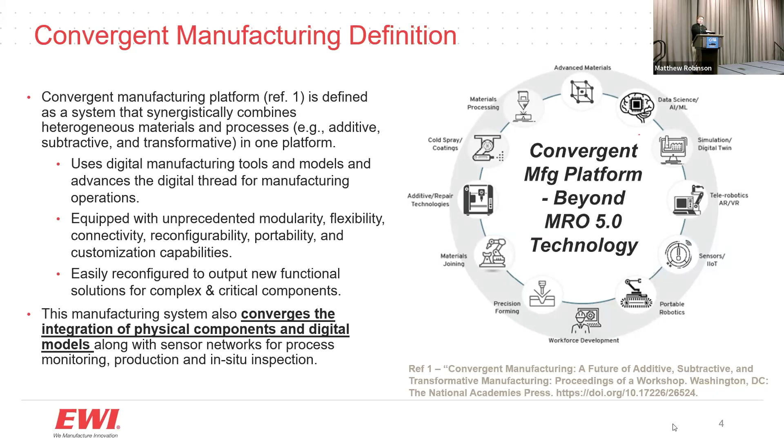And so for us, that's where we see it is, it's not just the software side, it's software enabling hardware to do a process, right? For us, that's really important because at the end of the day, if you can't do a process the right way, you can't really automate it to begin with, right? And that includes everything from materials all the way to the final end robustness.

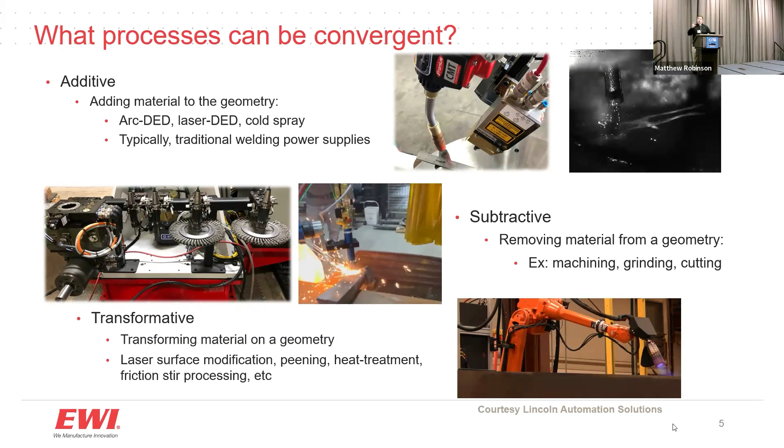And so we kind of define convergent processes in 3 different buckets for us. There's additive processes that can be anything from arc DED, laser DED, cold spray, thermal spray, using traditional power supplies, things that already exist. We have subtractive technology, so the stuff with PushCorp that they just talked about, robotic torch cutting, anything like that where you're actually doing material removal. And then there's also transformative, heat treating is a thing, right? You do something, you mess up the microstructure, you got to go back and do the heat treat to fix it. And so all of these things are converging hardware processes with material properties with software tools that kind of define all of that.

And so at EWI, we have lots of different robot systems. They're all off-the-shelf equipment, mostly, that we kind of use for this type of stuff. So this is our gantry system. I throw it up there because it's big and flashy and sexy. But it's got 2 different arc welding power supplies on it. We actually just integrated a 6 kilowatt laser into it as well that we're using for laser shot peening and also some laser DED applications. We've got a PushCorp on there doing grinding, brushing, machining on this system as well, all within the same scope. We will be using 2 or 3 different commercially available software tools to help enable this, PowerMill, Adaxis, Siemens NX, all of that kind of stuff we kind of dabble in and play in just depending on what our clients need and commercial people need.

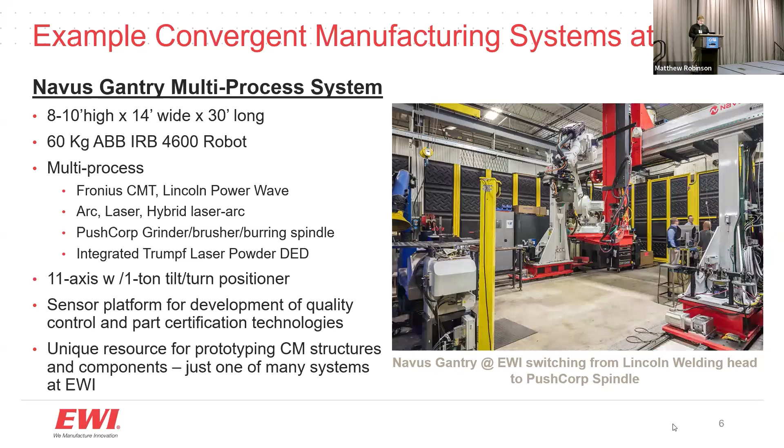With this, a lot of the stuff that we try to break it down into for convergent manufacturing is there's a physical system, there's manufacturing processes, and then there's also a workflow associated with those, right? If you do transformation matrices, which I'm sure a lot of you guys do, the order matters, right? You can't do certain processes in certain orders. There's joint limitations. There's all the things that go along with being able to build stuff.

And so my background's a lot in the arc DED side. So there's lots of complex toolpaths there. Max kind of mentioned it, right? You get a part out there, you got to do complex circles. Those circles have to be stacked on top of each other, 700 layers, and those all have to be controlled within a couple millimeters for your stick out and contact distance, such that you're getting good process settings. So there's a lot of nuance that goes into actually applying a process for robotic applications.

So this is just an example of a part that we built. So custom ultra high strength steel that we worked with ESAB to actually develop the custom metal core consumable. We did the material property testing and then we're able to simulate it and put it in on one of our systems.

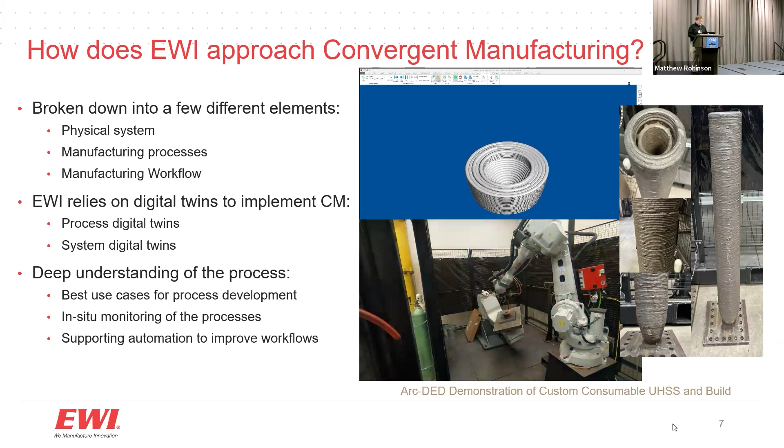So the big thing that I think is a lot overlooked in some of the applications is supporting processes, right? Hey, you got to have an IR camera on this to measure interpass, but sometimes those aren't accurate enough, right? So you need to get a laser pyrometer. You got to do torch maintenance. If you're those guys who've been in those heavy industries, you can only weld so long before you need to do a tip change, before you need to do stuff, right? And that's part of your system, right? It fundamentally has to be integrated into your system and into your workflow.

People like to throw out lights out, right? That's another buzzword, right? Let's turn the lights off and let it get going. There's a lot of nuance for those people that try to run it. Gas management, being able to update your TCP on the fly, all of those little small things, right, that stack up and build that tech debt, right? And so that's where we feel we play a role in this, is trying to help understand all of those for that convergent manufacturing workflow. And at the end of the day, it really boils down to those bottom 2, right? Ensure your process stability and recover and prevent errors, right? If you do those 2 things for your process, you get a good part out.

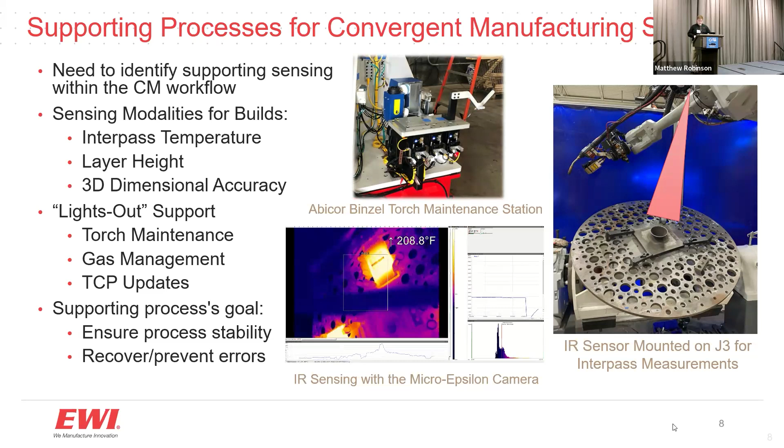So this is just an example. Throw it up here because I told Max I would show the PushCorp a little bit. But this is just an example we did. We did a project with the Office of Naval Research using flux core DED. So for expeditionary environments, you don't want to carry shielding gas, right? So we're actually using a flux core electrode. If you guys know anything about welding, we go back, we brush off every layer. We're actually using a custom electrode as well as a special patented apparatus that we're reducing shielding gas down to 5 CFH for 316 stainless steel, still meeting nitrogen properties, still meeting all of the AWS spec requirements for that.

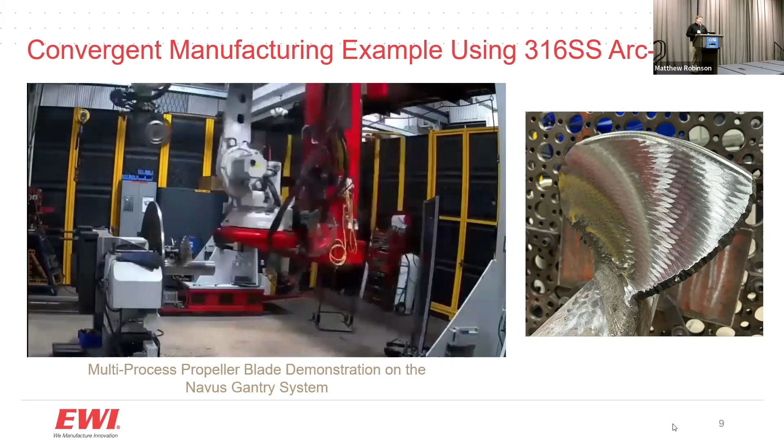With this, you got to go back and clean the slag off every pass, right? You got to go back, and then afterwards, what's nice is you can do this all in one system. You can go back and post-process the surface, as you can see on the right. So we're doing all of this with ATI tool changers, switching back and forth between those, using our trajectory planning software to actually drive the tool paths to what we need, while also layering in all of that other stuff I talked about. IR control for interpass sensing, force control for the compliance device. There's a lot of different elements that fall out into this. And so just one of the many examples and one of the ones I can talk about. So this one's a little fun one.

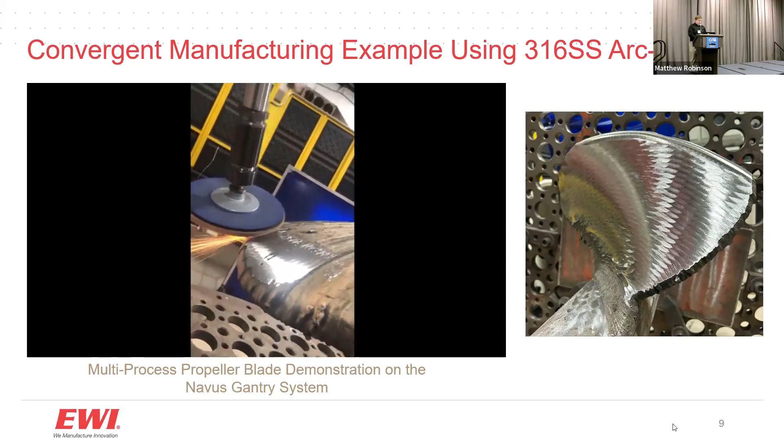So I want to talk a little bit about data. That's kind of where I'm going next with this. We have a really strong data science group here at EWI that's all focused on manufacturing data. And so we have a process. I got these slides approved last week, so that's always good. Working on maintenance, repair, and overhaul, right? So those of you guys know that for the DoD, this is a huge element, a huge area. There are so many depots all the way across the United States who are almost doing the same thing, just different materials, slightly different cell setups, different robot arms, different process heads. The geography plays that divergent role.

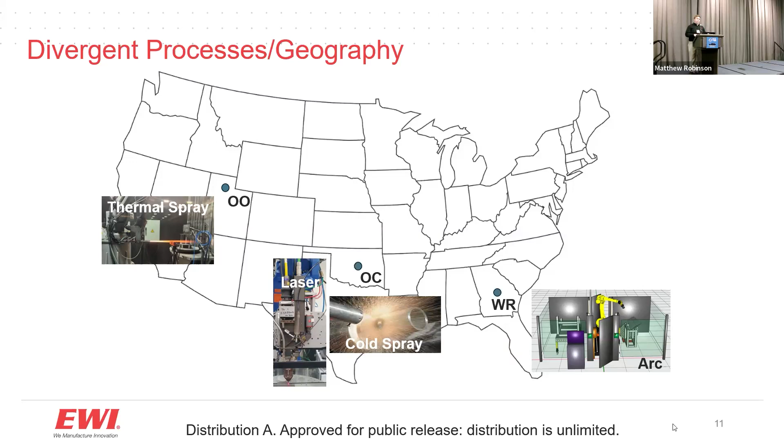These guys don't talk to each other, right? And they have no idea sometimes what others are doing. Being able to transfer data and making it qualified is kind of treated as tribal knowledge and secrets. And so something that's really important is how do we build the infrastructure around this that enables crosstalk, right? That enables transference of process parameters, that transfer of those manufacturing workflows across depots to build efficiency. And so I shamelessly stole most of these slides from Alex, but FAIR data, you guys know about this, I've heard this before.

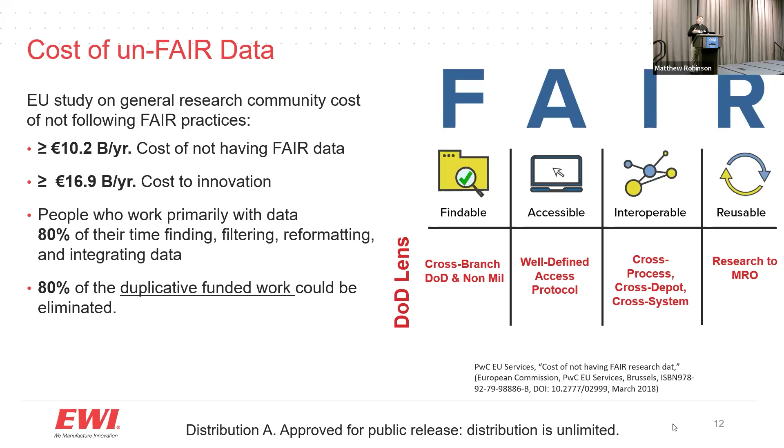There's probably $17 billion a year in euros lost just because of how badly data is organized. Right? How often have you guys, your welders, gone back and been like, oh, we welded this 10 years ago with these settings, and you can't find them, right? You got to go talk to the guy who talked to somebody who, oh, I think it was close to this, right, and tune it back in. And so with a lot of this stuff, what we've tried to do is build a digital thread and an infrastructure that we can actually use and reuse, right, collecting the appropriate data and contextualizing it within the manufacturing processes as well. And I'll let you read this, but black boxes.

Another huge issue, right? This is the one thing, vendor lock. You hear the DoD talk about it all the time. This is something that is a huge problem, right? They don't know how something works. We can't explain why it works.

It just does, right? You get the same OEMs providing the same equipment over and over again because it's too cost intensive for them to be able to redesign and re-implement something. And so this is something that I feel like as a community in manufacturing and robotics we have to do better at, right? We have to be able to find ways to cross-collaborate and talk about those. So getting into this.

So this convergent digital infrastructure, we are about halfway through a 4 or 5 year project working on this. Really, it's pretty simple at the end of the day. It's an MQTT broker. We've built our own edge of network drivers that are collecting all this data and contextualizing it. So it's meant to be plug and play device integration. So this is part of why I'm throwing this out here in the ROS. I'm trying to figure out all the things that already exist. We don't want to reinvent the wheel here, right?

A lot of this is just about how you organize the data that we're generating such that it can be reusable and interoperable. And so we are working across, as I mentioned before, laser DED, cold spray, thermal spray, arc welding, and then actually NDE processes, and trying to use this similar infrastructure to do all of this stuff.

The FAIR Digital Thread, we tie that back into a MongoDB database, which they actually use, I believe, for the stock trading markets, right? So it's super stable. The code base is out there. You're really able to leverage all these things.

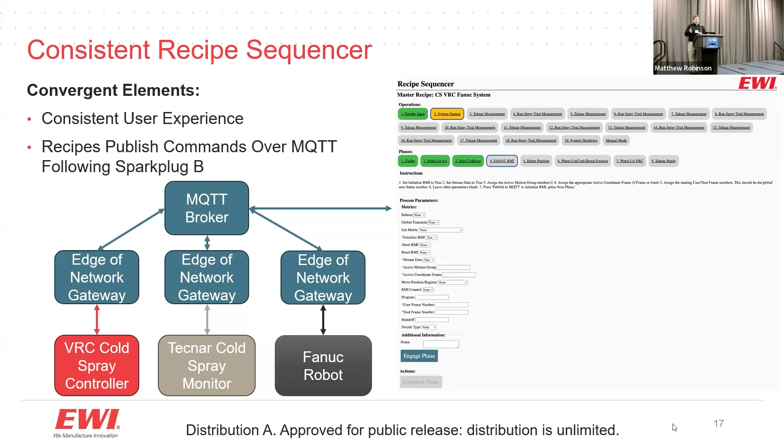Oh, why did that work and this one didn't? We can go back and cross-compare instantaneously and say, you're right, we had a velocity change. Why did that happen? Oh, a kinematic change, right? All of that stuff can be tied back. You see it in the process, you say, hey, it didn't work, but it's based off of a robot kinematic. How do you correlate and crosstalk between those two?

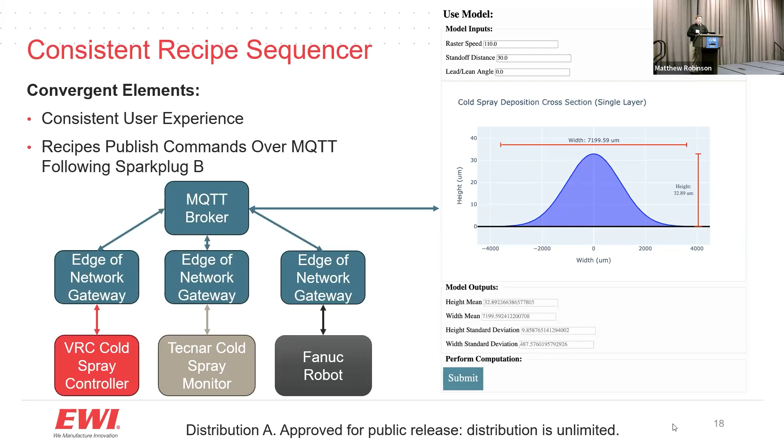With those as well, we have built a lot of models. So again, we're process experts, right? These are pretty simple. They're just deposition models. It's nothing crazy. It's bead height, width, stepovers, right? And now we're starting to grow these and add to our repertoire: different material types, different spray parameters, what the width of those are and how we attack that.

So the data flow example, again, just throwing this up here: we've got equipment, you've got the communication codes, we run all of that through an MQTT broker. We're using Kafka and MongoDB to store in the database. We've got real-time displays, we've got recipe sequencers that we're using to tie all this together.

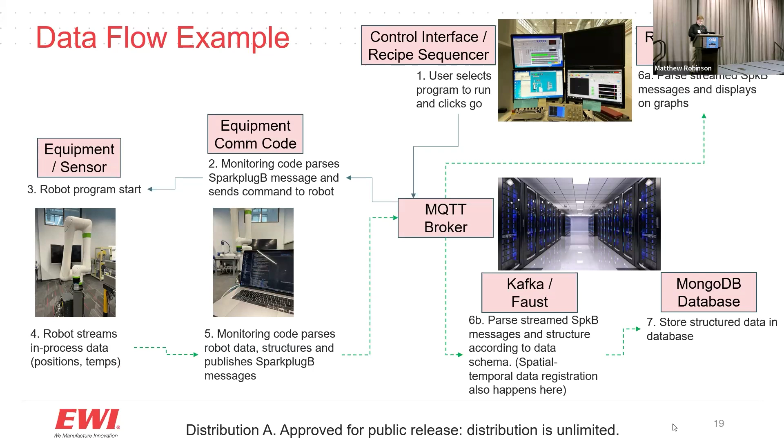And so again, this is the start, right? It's not 100% there, but from a data manufacturing standpoint, it's really important to understand all of the nuances that go into that. Okay. And then this is really just saying, hey, this all falls into that schema.

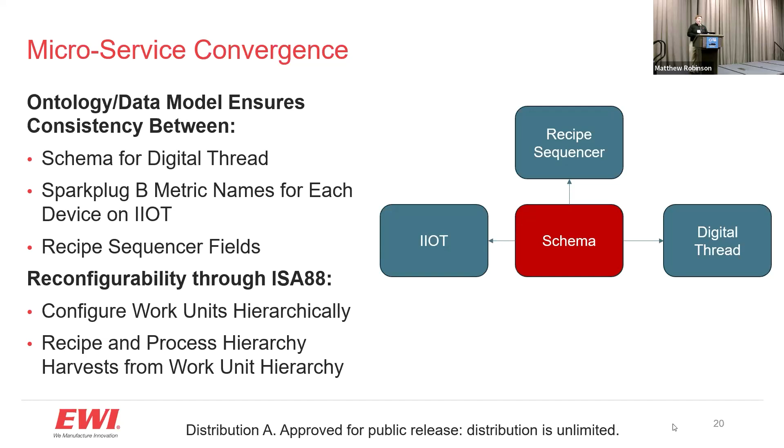So the beautiful thing about the ISA 88 is when we store these toolpaths, we can say, hey, we want to do the exact same spray again, but maybe apply it to a different toolpath geometry. And so it's all the stuff the welders have done before, right? Hey, we know how to weld this kind of thing. Let's replay that and redo it.

Okay, so I was tasked to talk about challenges, right? So now we're kind of getting into the challenges. I've laid out the stuff we're working on, some of the things that I feel is important that we address and try to get through with this. Digital twins, another great buzzword, but there are a lot of differences between your CAD and whatever your simulation is, how people treat their joint kinematics between power supplies and robots.

At the end of the day, a robot is a robot. It has a behavior and the controller goes in a direction you need it to, but it's just moving a TCP in space, right? So how can we make sure that I can pick up a Fanuc robot or a Yaskawa robot and use it for the same application? Those types of things are really important.

Post-processor, maybe one day we'll get to the point where we don't have to run teach pendant codes for every little thing in a manufacturing environment, but I very much doubt that anytime soon. So we've got to understand how you can cross-translate those as well and make sure that all of those supporting processes, IR, things like that, can actually be integrated the same way. That's something I love about ROS, the fact that there's already this built-in framework that we can leverage between those.

And again, example workflows and current use cases, right? How can we learn from something that people have already done before so we don't have to completely reinvent the wheel? I throw this up here to say, you guys saw that demo. There's a lot of steps along the manufacturing process. Again, order matters, right? But at the end of the day, you kind of need a process expert.

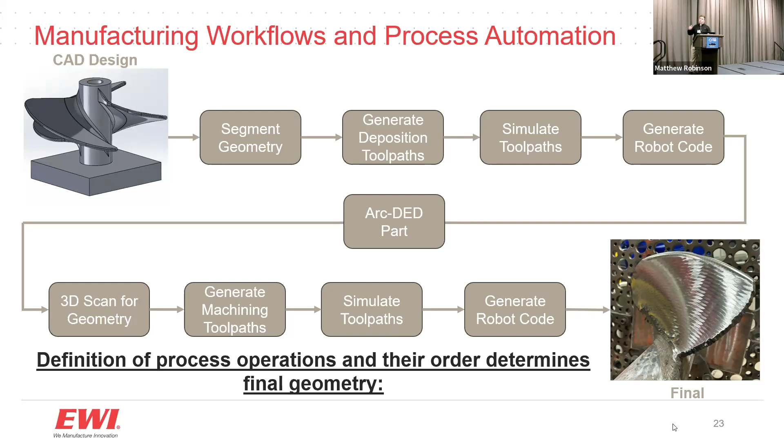That's something I'm learning as more of a robot-centric person in a process-heavy organization, is that at the end of the day, we're slave to the processes, right? It doesn't matter how well you can make the robot move, doesn't matter how awesome whatever sensor you have, if you put down bad material, you make something wrong, nobody cares, right? You could have the coolest thing on planet Earth when it comes to toolpath planning, but nobody cares if you can't do it right. And so process stability and knowing the right way for manufacturing and workflows is very, very important.

And then lastly, back to that cross-platform qualification and transference. I think this one's key out of everything I talk about today. We talked about that divergence that happens within the depots themselves, right? How can I cross-qualify this type of thermal spray gun with the other one? How do I know that if I use a Fanuc motion controller or a Yaskawa motion controller, an ABB controller, to do the same physical pass in the virtual space, that it's actually having a similar behavior?

And this is something that we, as robot people, should turn and look inwards on, right? And talk about better ways to figure this out, because when you're looking at thermal spray, it's velocity control. It's all about the speed at which you move, not necessarily the accuracy. You get into stuff like automated NDE, where you need to be triggering every 0.01 millimeters to take that eddy current measurement. Two completely different things, but enabled by the same exact mechanical architecture.

And so it's really important to understand those nuances and differences and understand that we are a slave to the process, so we're going to have to sort that out within ourselves. So those are just concluding thoughts: process stability, manufacturing workflows, digital twins and cross transference, supporting processes and all that data. We've got a lot to look into, but I'm looking forward to getting integrated more with everybody.

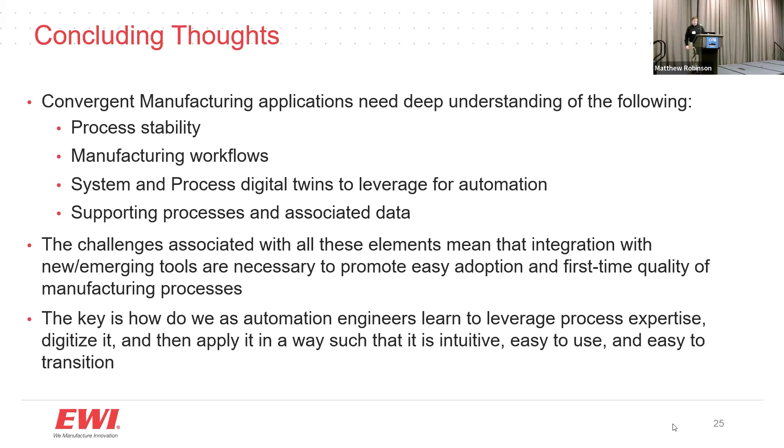No, this. Yes. So I mentioned earlier about a little bit of distinction, right? Like we can exchange information, we can talk about joint states, but this is definitely a little bit more in the weeds. Here I talked about the semantics. So we had that big conversation. Dave Coleman raised it, and then we got on the global, and then we're talking about interoperability across controllers.

We start talking about some of these motions, right? Constant velocity, accurate path versus velocity trade-offs. All of these manipulators make those trade-offs differently. And so long ago, I could pick up my FANUC or my ABB manual and maybe a Scala manual, and it would actually talk about, hey, you turn this little knob and it's going to honor the path, or you make this and it's going to have more consistent velocity around the corner.

That level of semantics, I think we've lost a little bit of that, or it's hard to discern that even with being able to move. And is that something you've observed as well? Oh yes, all the time. So I think as we begin this journey about rethinking some of our practices to help OEMs provide better interfaces, that's why we use the term behavior quite a bit when we're talking about our process too. And it drives confidence in the end user. I want to make sure when I tell that robot to make that move, it's going to make a move that makes sense, a move that I would do with the teaching.

Yep. Right. So consistent behavior, particularly as we hop from yellow to orange. Raise a hand. Who's programmed a Cloos robot? Yeah, only a couple of us, right? Like Steve. So that was less fun to get autonomous motion control working on.

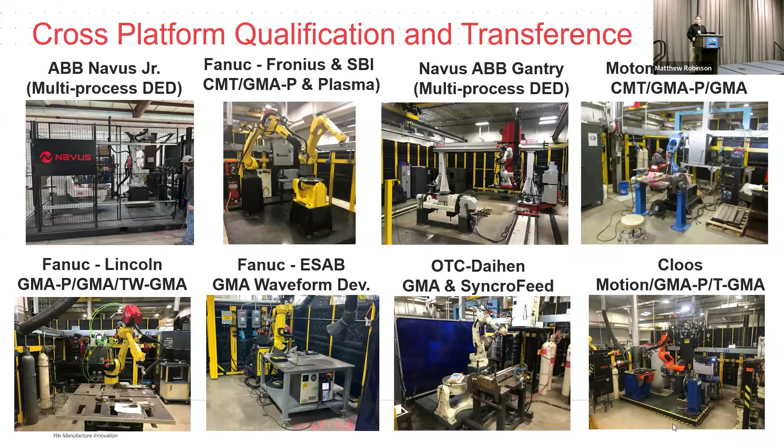Yeah, anyone who's actually worked at a large company knows trying to get standard data practices across the whole corporation is like pushing a rope.